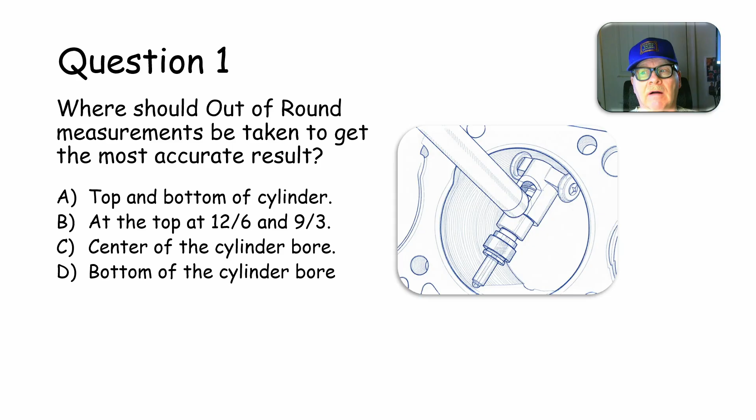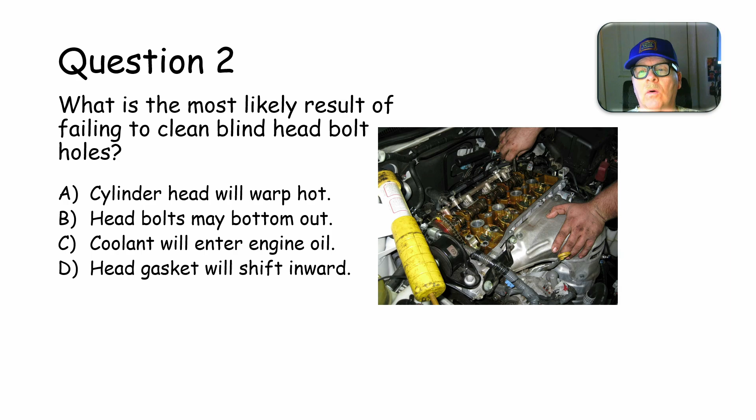Question 2. What is the most likely result of failing to clean blind head bolt holes? Will it warp the cylinder head? Will the head bolts bottom out? Will the coolant enter the engine oil? Or will the head gasket shift inward?

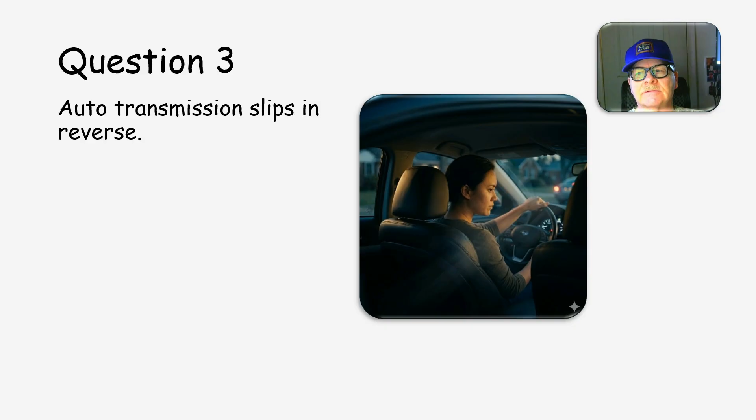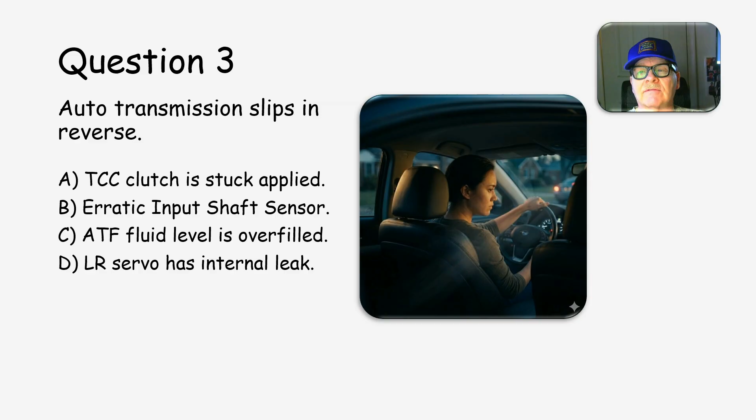Question 3. The automatic transmission slips in reverse. This gal right here is upset about that. Does that mean the TCC clutch is stuck applied? That it has an erratic input shaft sensor? The ATF fluid level is overfilled? Or the LR servo has an internal leak?

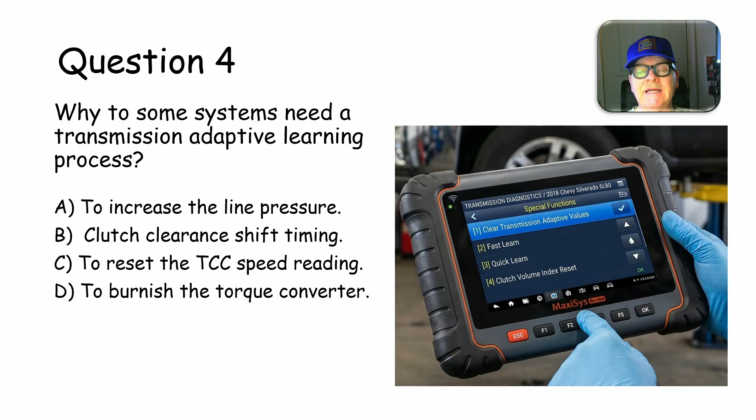Question 4. Why do some systems need a transmission adaptive learning process? Is it to increase the line pressure? For clutch clearance shift timing? To reset the torque converter clutch speed reading? Or to burnish the torque converter?

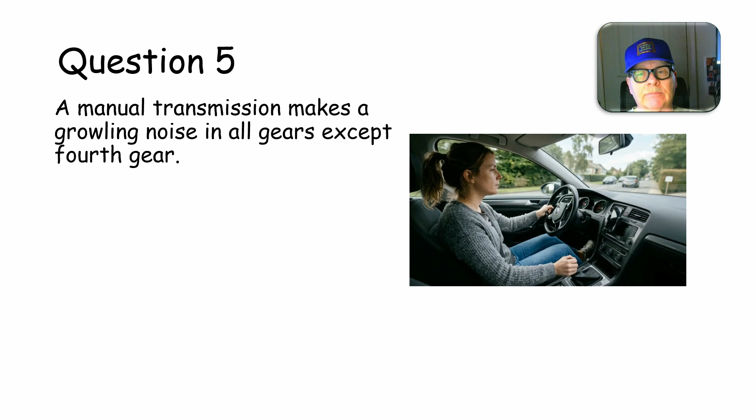Question 5. A manual transmission makes a growling noise in all gears except fourth gear. Is it a stuck throwout bearing, a worn input shaft bearing, loose synchronizer rings, or a brinelled ring gear bearing?

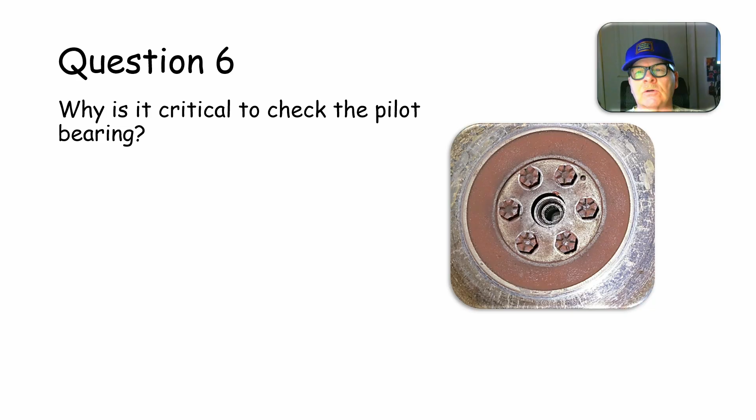Question 6. Why is it critical to check the pilot bearing? Does it maintain pressure plate tensioning? Does the bearing enable the clutch to release? Is it that a bad bearing can spin the input shaft, or can it cause a hard clutch pedal?

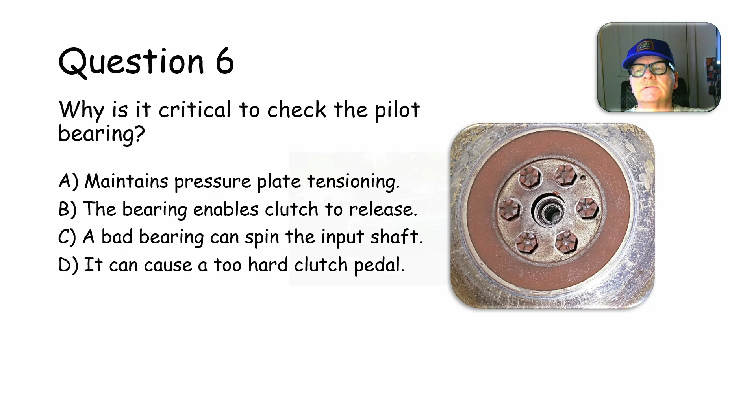Question number 7. The power steering on a 72 Mustang is very hard, but only in one direction. Is it a binding pitman arm, counterclockwise belt slippage, wrong power steering fluid used, or a spool valve issue?

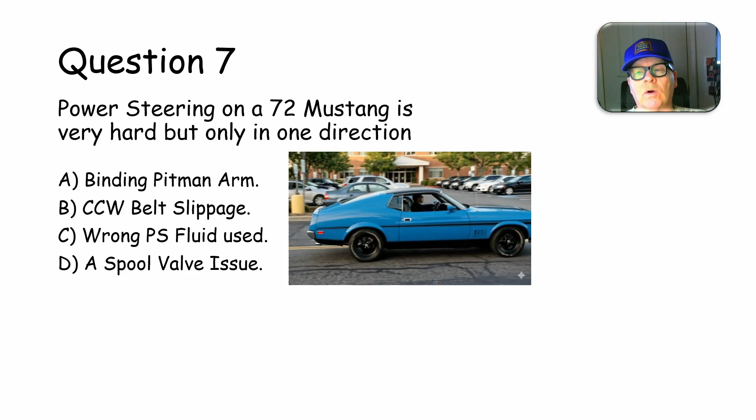Question 8. One of the steering rack bellows boots is oily. Is the bellows boot cracked, or is the steering rack seal that has failed? Is it in normal condition on that rack, or is the pump reservoir overfilled?

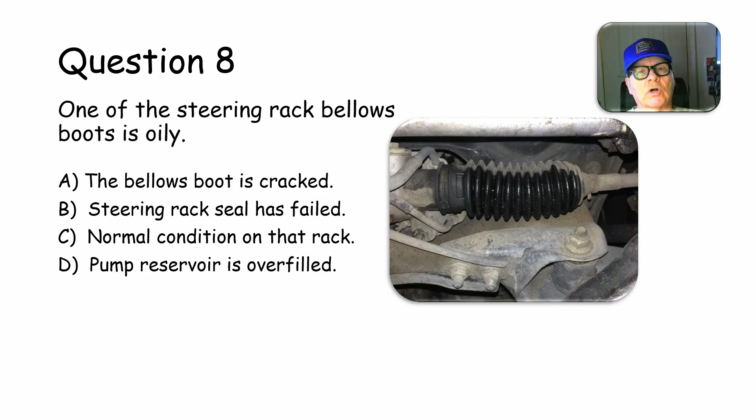Here are your answers.

The out-of-round measurements need to be taken at the top because that's where most of your wear is going to be. It's really surprising how many times years and years ago we used to throw rings and bearings in on faith. But the right way to overhaul particularly one of your old big block engines is to go ahead and have it bored 30 over and buy new 30 over pistons.

That way you'll have perfectly round holes and a whole lot better job. Sometimes when we'd build one, even though we deglazed the cylinder walls and all that, it would burn oil because the holes weren't quite round. But it's really surprising how an engine wants to run, and it wouldn't burn a lot of oil. Even on your newer engines from Ford and GM, there were bulletins that said if the engine wasn't burning more than a quart of oil every 1,000 miles, they considered that within spec.

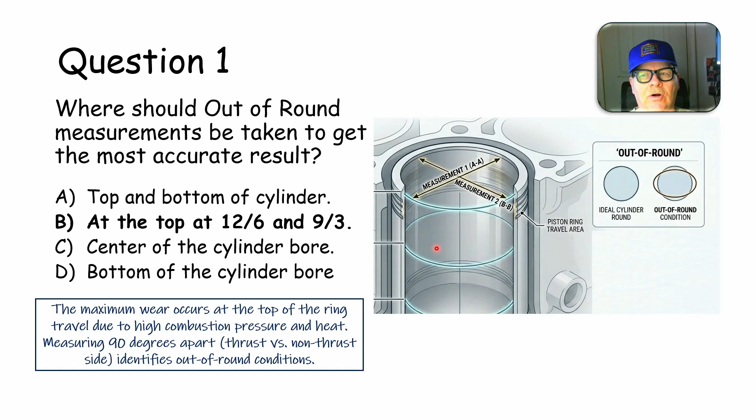Anyway, the maximum wear occurs at the top, so 12, 6 and 9, 3 are like clock positions, so you're right under where the rings, right under the ring groove if it has one. You measure it at the top. Of course, you can measure here and there and compare them all, but if any of them, this is the one most likely to be out of round, and it doesn't matter what the others are. If this one's out of round, you need to do something about it if you want a good engine overall. The most likely result of failing to clean blind head bolt holes is that the head bolts may bottom out.

And when they bottom out, that liquid's not going to compress, and it's either going to stop the bolt from getting tight so that it blows the gasket out right there where that bolt is, or it's going to bust something.

All right, here's what happened. Somebody left fluid in that hole and they tightened that thing down, and because it didn't completely tighten up, they just kept cranking on it. At the college where I taught automotive for about 19 years, the diesel department down there had this big Cummins VT 904 or 906, whatever it was, and his students were putting a head back on it. Somehow some liquid or oil got down in one of those bolt holes, and they couldn't get that bolt head to tighten down snug against the cylinder. They could still see space there, and so rather than pulling the bolts out and making sure there was no fluid in the hole, they just kept cranking on it, and they busted the block on that Cummins engine. It was his trainer engine, which was a disaster. They couldn't use that engine anymore.

But anyway, that situation happened to me in 1975, I guess it was, when I was working at that gas station, and I rebuilt the engine on that black Chrysler that my dad had traded that lady out of. Whenever I was putting the cylinder head back on, somehow or another I managed to trap some coolant. Just enough coolant was trapped in the bottom of that hole so that it didn't tighten against the cylinder head. Driving home after the first time I drove it, after I got the rings and bearings and all that replaced in it, it blew the gasket on that corner of the head.

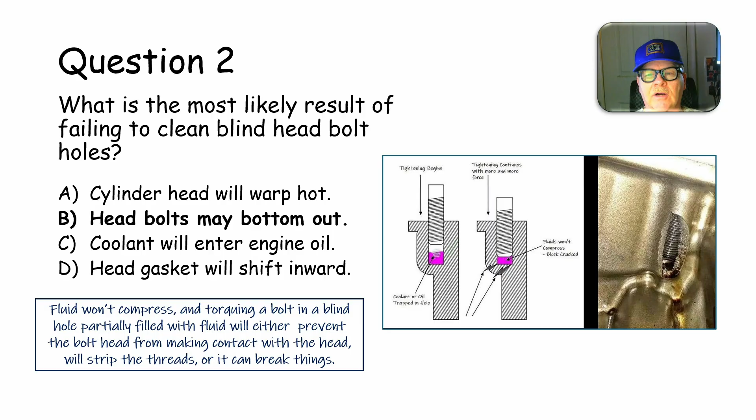So I had to pull the head back off and make sure. What I like to do is take a blower with a small nozzle and stick it down in each head bolt hole or any other blind hole you're putting a bolt into, and blast that thing with air, and make darn sure, then look in it with your pen light and make sure there's nothing in that hole at all. Sometimes it's a good idea to go ahead and chase the threads too, and blow all of that out, then you're ready that way. So just keep that in mind. Fluid won't compress. Torquing a bolt into that blind hole, you can bust something, or it won't get tight. There's all kinds of issues with that.

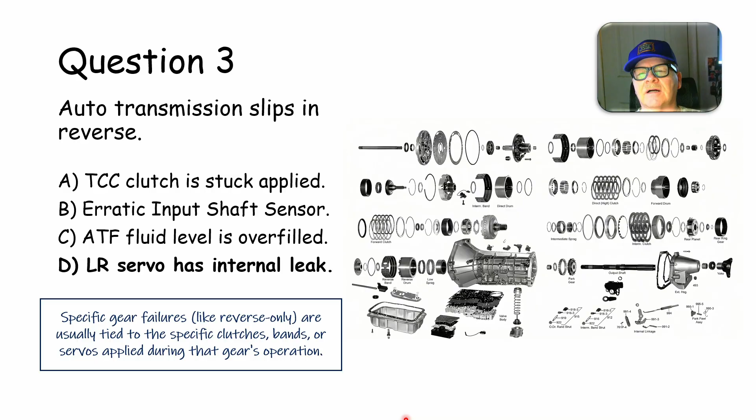Automatic transmission slips in reverse. This servo, I said that's low reverse—it's not always low reverse, sometimes it's just reverse. Let's zoom in on that. Specific gear failures are usually tied to specific clutches, bands, or servos applied during that gear. This is a 5R55E, and that servo right there applies this band around that drum, and it's hooked to the...

You've got your sun gears—the basic sun gear, the sun gear, planetary gears, the sun gear, the planet gears, and the pinion. If you hold the pinions, which is the one that's got the little gears around the sun gear, you hold it still and won't let it turn. If you drive the sun gear, the ring gear runs the opposite direction, and vice versa. If you drive the ring gear, the sun gear spins in the opposite direction if you're holding the pinion gears. That's just basically how that kind of thing works. Anyway, for what that's worth, there it is.

Why do some systems need a transmission adaptive learning process? Well, the clutch clearance shift timing is what that's all about. It adjusts the volume and timing of fluid application to ensure smooth shifts as internal components wear or are replaced with new clearances.

The scan tools—particularly Chrysler—were pretty wise in how they would put clutch volume index readings. If you got used to looking at those clutch volume index readings on a Chrysler transaxle transmission, you could look at those numbers it had stored for its adaptive learning and tell which one of the clutches was having to work the hardest to apply. If the clutch volume index number was a lot higher than it should be, you would know the numbers you usually saw.

It's a good idea when you're doing any kind of scan tool work or scope work or anything like that, to scope and scan as many good cars as you possibly can that don't have problems.

And that way, when you scope a car that has problems of the same kind you scoped before, you'll basically remember what it should look like, and you'll be able to pick out the bad numbers on the car you're scanning if you've got one with a problem.

Now, on a lot of the scan tools, it's cool as all get out, because these tablet scan tools can actually save screenshots. So if you go ahead and scan a bunch of vehicles, like say you're working on a lot of LS engines and Chevy pickups, scan those, lots of them, and make as many screenshots as you can and save those in a folder. You can put them on a jump drive or whatever, if you've got a good scan tool that'll do that. And that way you've got yourself a library.

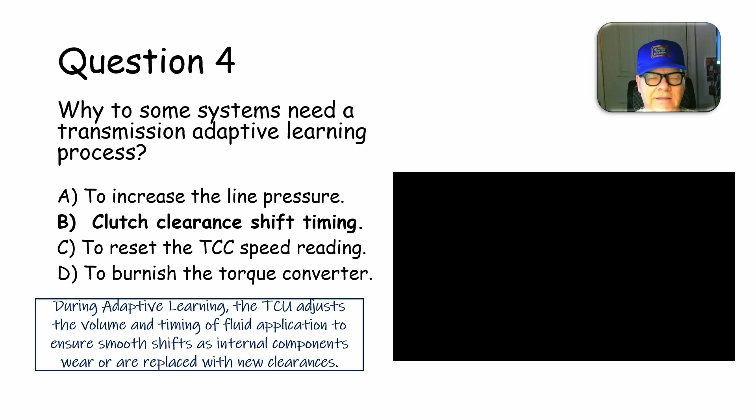Manual transmission makes a growling noise in all gears except fourth gear—that's a worn input shaft bearing. The bearing is right around the input shaft where it goes into the transmission, this bearing right here. Now you might notice when you're in fourth gear there's no sideways pressure on that bearing; it's just spinning without any pressure on it at all. But whenever you're in any of the other gears, you're going through that cluster gear, and it's pushing this sideways—in other words, there's a lateral pressure on that bearing.

Not in neutral—you're not typically going to hear it in neutral, but this is the way that thing works. And of course there's your first gear and second and third and fourth and all that. But in fifth gear even, a lot of times it'll make a noise because you still got pressure on that one. And of course in reverse, you're not going to be going fast enough to hear it typically. But long and short of it is, it's going to be fourth gear.

I had run into that several times. Now sometimes if the transmission has run low on fluid, it will destroy not only that bearing but the input shaft and the counter shaft too. So it's really important to keep the fluid checked on a manual transmission, because if that oil leaks out a little at a time, over time you're going to lose all your oil.

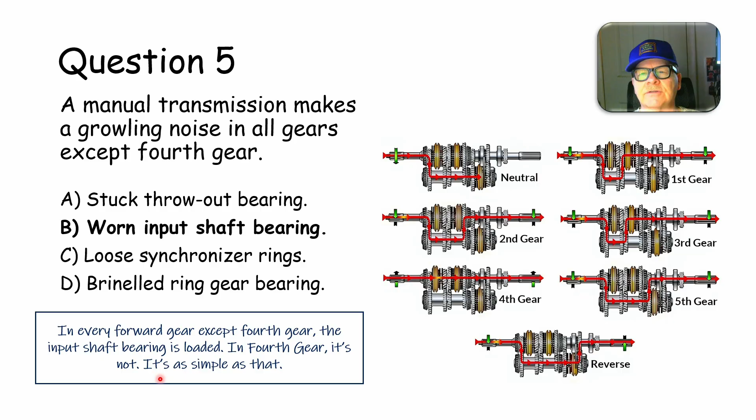Same way with your differential—you can actually wind up with low oil in the differential if you've got a leak that doesn't seem that bad because it's not making spots on the pavement. You need to be well aware of that. Keep that oil checked. But anyway, it'll be a worn input shaft bearing on that one. If it's quiet in fourth but noisy in all the other gears, your input shaft bearing is it.

Why is it critical to check the pilot bearing? Well, that's because a bad bearing can spin the input shaft, and if it's spinning fast enough, you're going to find a little dab of gear clash when you're trying to put it in gear.

Since reverse is typically spur gears, when you're putting it in reverse it's going to bump. The spurs are going to bump, and you'll have to let off the clutch briefly and spin the gear a little bit to drop them in. But if you've got one that won't release, this can be the cause of it. Also, a warped clutch disc can cause that. I've seen that before. But anyway, it's going to spin the shaft.

This is where the pilot bearing rides. You can see how a bad pilot bearing—that's the bushing, the bearing, and a different kind of bearing area—is sealed. This one right here is typically the most likely to fail. On these, the way we'd get them out was we'd pack them full of grease, then have a shaft that was exactly the right size to go in there and drive that shaft through, and that grease would force the bushing out. Or they make tools to pull them out, but whatever.

With these needle bearings, I've shown you before how I built a tool to pull those out. And then these right here, they've got a little tool for that too. But anyway, this thing ought to be totally free and not have any pressure to turn at all when you mash the clutch and it releases. That's the whole deal.

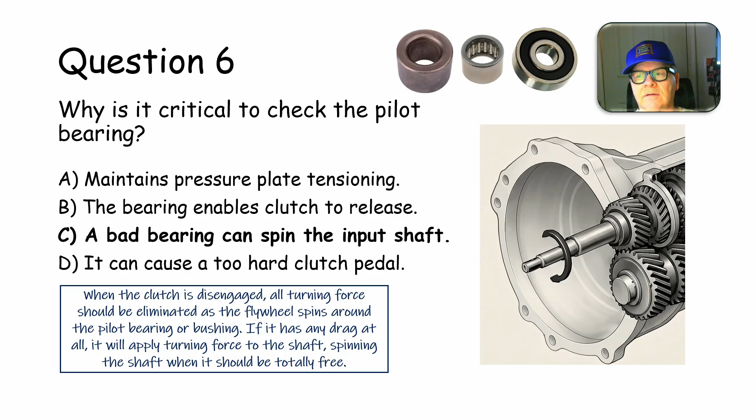Power steering on a 72 Mustang is very hard, but only in one direction. I have seen this, believe it or not. It's a spool valve issue, is what it is.

This is a spool valve up here, and when you turn the wheel, the spool valve moves just a little bit, and it directs fluid over here to help you turn in that direction, and it directs fluid here to help you turn in that direction. Well, actually up in here.

I pulled the steering gear out and took it apart. I knew how to do that—I'd taken it apart and put it back together before, successfully, without any problem. But on this particular one, you see these threads? There's supposed to be a lock nut there that's not shown. Those threads are how you adjust that spool valve, and that spool valve's got to be adjusted just exactly right, or that thing is absolutely going to have a lot more power turning one way than the other.

When I put the one back together on that 72 Mustang, as soon as you started the car, the wheel would spin all the way to the right. I kept fooling with it and adjusting it, and I never could get it right. It may have been something wrong inside the gear, but the problem was a whole lot worse after I tried to rebuild it than before, and I never could figure it out. So we got another gear from a salvage yard and put it on there. That was one of those I learned a heck of a lot on.

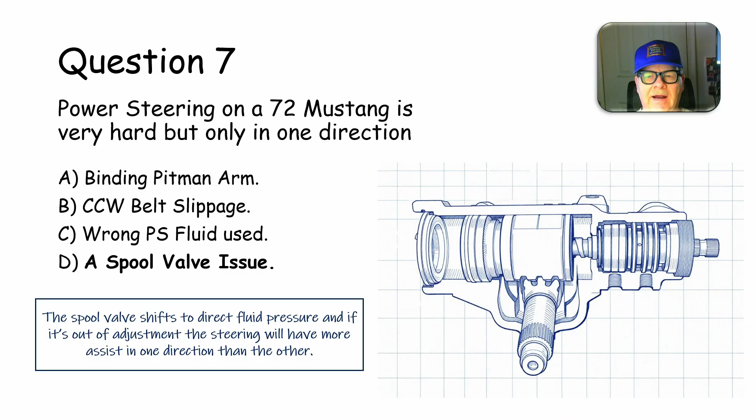But anything, even on your steering rack, there's a spool valve in there, and it basically directs the fluid back and forth to help you turn. One of the steering rack bellows boots is oily—you've got fluid in here. There's not supposed to be any fluid out here on either side, only in here.

You've got a center seal, an end seal, a power cylinder, and this right here slides through these seals, but this seal is part of the rack. As fluid is directed in here, it helps you turn that way, and as fluid is directed here, it helps you turn that way. If there's any oil out here—there's never supposed to be oil out here—and if it's dripping from these boots, one of these seals has failed. That's pretty doggone simple.

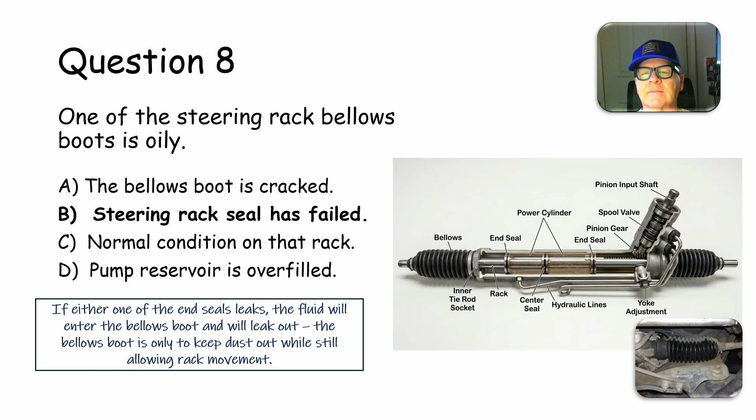Vehicle's got a hard pedal. I should have written this question as: the first time you mash the brake, the pedal goes closer to the floor. It's firm, but it goes closer to the floor. The second time, it catches right on the top. I messed up writing the question and didn't bold the answer, but it means your rear brake shoes need to be adjusted. When the rear brake shoes aren't adjusted properly, it'll require two pedal applications to get a full pedal.

The first pump takes up the space, and the second one is when you're actually applying the brake. This is a duo-servo brake system, as are others, and this one is really susceptible to that. That's why you have to adjust those brakes to where they're really close to the drum. If you just pop all the springs off and screw your adjuster all the way in, then slap the drum back on, you're basically going to have a low pedal and then a high pedal. It won't be spongy the first time, it'll be hard both times, but you'll hit it and then it comes back up.

My sister-in-law had a Taurus she was driving. She came for a visit from Tuscaloosa and said the Taurus needed rear brakes, and the shops up there wanted to charge her $300 to do the rear brakes. Because she was my sister-in-law, while she was talking to my wife, I jacked that car up in the driveway, bought a $16 set of brake shoes, and popped them on in about 30 minutes. I had to be careful to adjust those so the pedal would feel right.

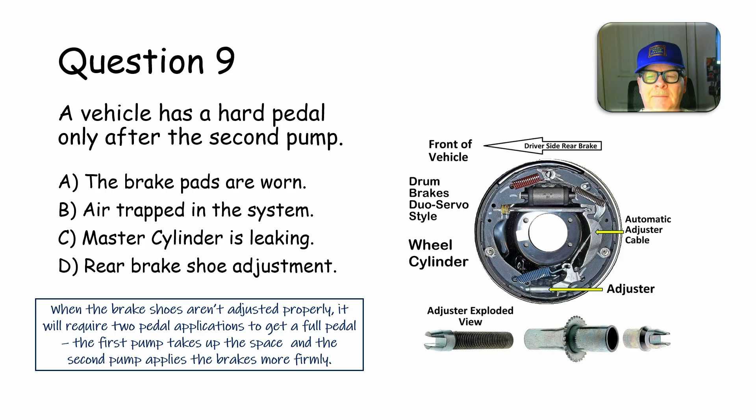One guy went over there—I sent him to that new shop to get a blower motor problem fixed on his truck. They put a blower motor on and had to replace the connector, and charged him $550 to replace a blower motor that's right under the dash. You can change it out in 20 minutes. I don't want to hate on everybody that charges a lot of money, but some of that stuff seems excessive. Like I say, I've done it both ways—we've worked on stuff like that.

What's the purpose of the metering valve in disc-drum brake systems? A metering valve delays the front disc brakes momentarily so the rear drum brakes engage first, which keeps nosedive from happening as bad and keeps the vehicle stable during light braking, particularly on slick pavement. A proportioning valve limits rear brake pressure during medium to hard braking so the rear wheels don't lock up before the fronts.